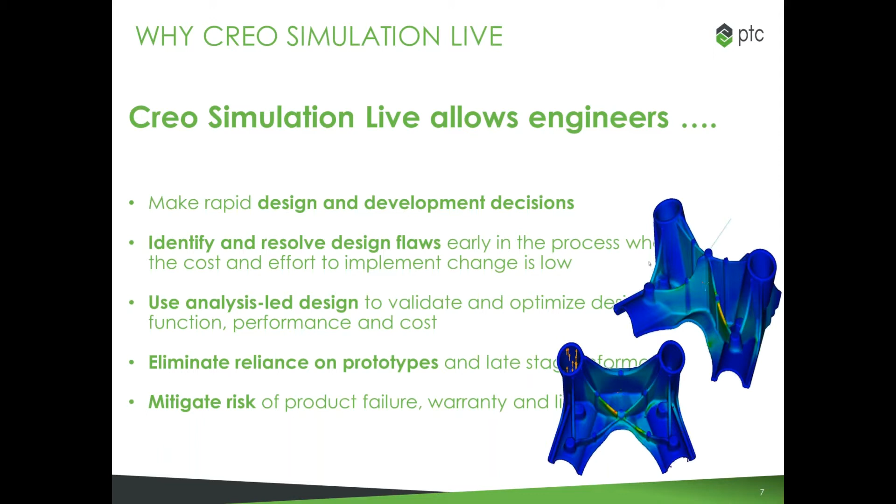What it'll give you is real-time feedback, a very intuitive, easy-to-use application with structural, thermal, and modal capabilities. It gives you the ability to simulate and animate these things and see them in real time, which you'll see as Terry delivers the demonstration. Most importantly, it's embedded integral within the Creo environment, but it leverages the ANSYS simulation technology and power that it provides.

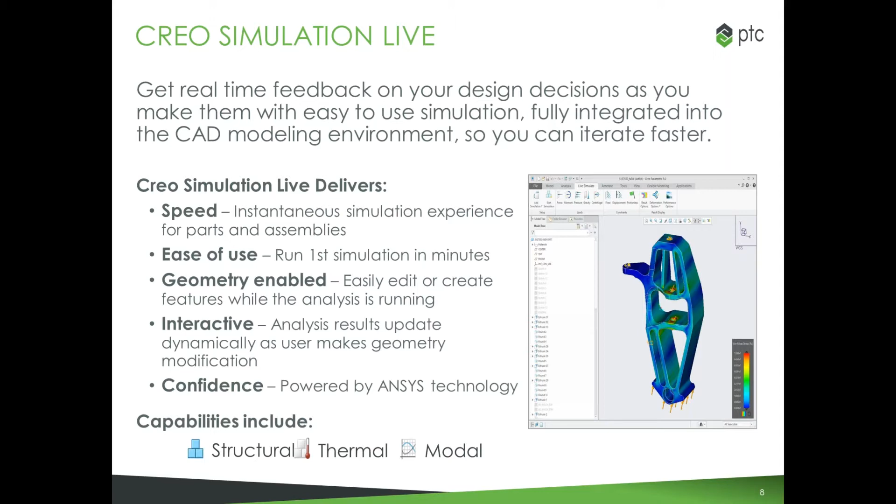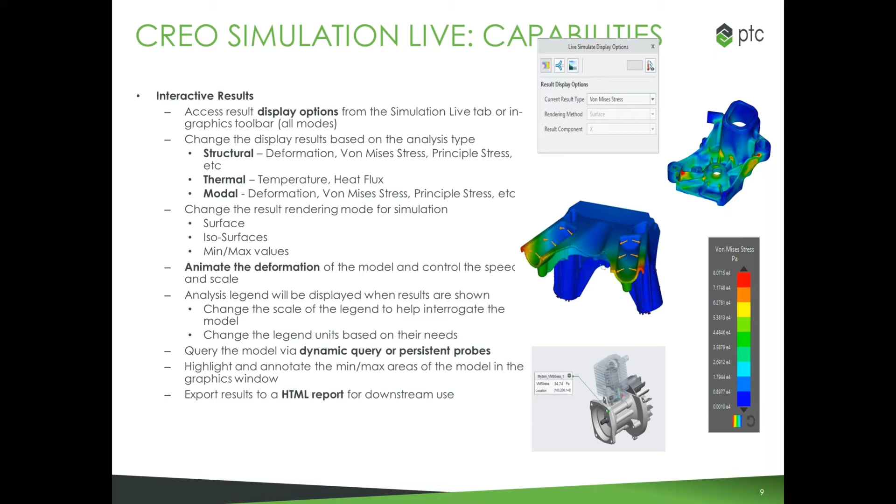I'll just build this slide out at a high level. As you can see here, some of the simulation animations and still photos—Von Mises stresses and the things you should expect from a simulation solution capability—are part of this Creo Simulation Live capability.

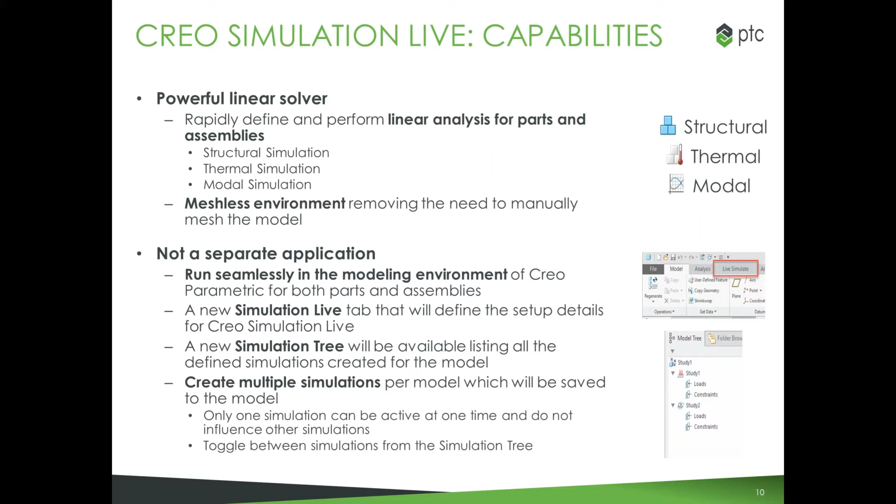It allows you to do power linear solving, the meshless capabilities, and it shows up as a tab within the Creo environment. So as many of you are designers using Creo today to digitally design your products, you want to be able to seamlessly design your parts, assemblies, models, and go very quickly into Simulate, getting those results real time—not having to export out or jump into another application or save files. So from an efficiency and speed standpoint, it's critical that it's a tab within the Creo Parametric application.

I do want to highlight that there are some links here, so hopefully many of you have PTC support accounts created.

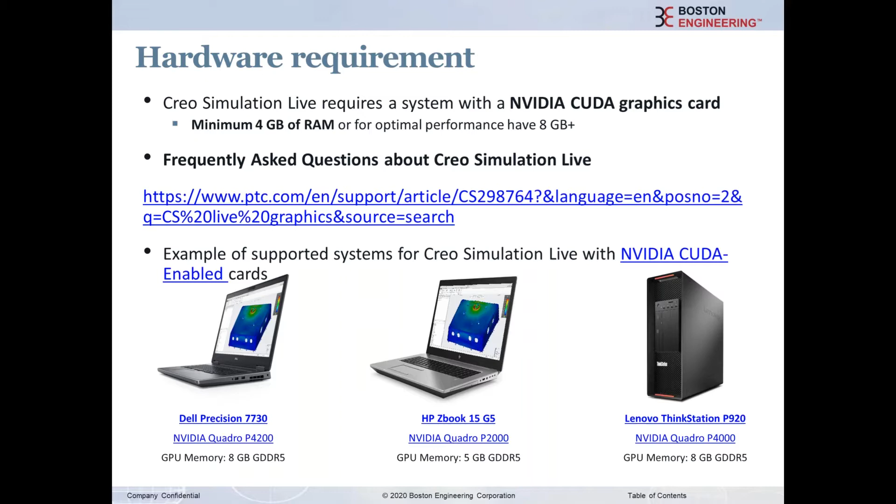This link we'll provide has a ton of frequently asked questions on Creo Simulation Live. It's important from a hardware perspective that it has some requirements - you want to make sure you have certified graphics cards to run Creo Simulation Live, and include that as part of the selection process, or if you purchase the software from Boston Engineering or elsewhere, take that into account, since it's important for performance and making sure you get the results you're expecting.

As noted before, Creo Simulation Live is the first solution that PTC and ANSYS have brought to market. It's been well received. We have a number of customers using it in production today, correlating simulations back to test data. From an accuracy and trust perspective, they see the benefits, and it's bringing simulation more upfront into the design space, as opposed to the more expansive PhD-type solutions ANSYS provides. Many of our customers using ANSYS - this is more purpose-built for the mechanical engineer designer aspect.

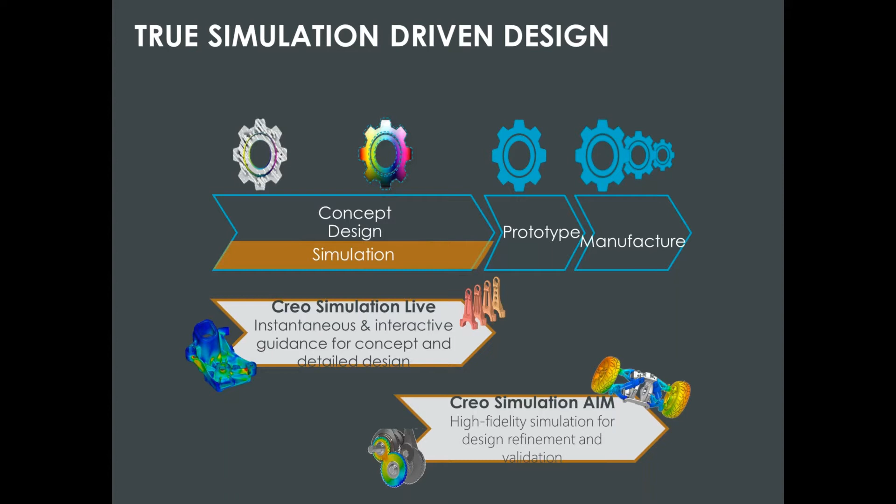Creo Simulation AIM will be coming out. As many of you know, Creo 7 will be coming out in a few weeks. Excited about that - PTC will have new capabilities and extensions available as they continue to deliver more technology. PTC's strategy on simulation is ANSYS, so more to come on that.

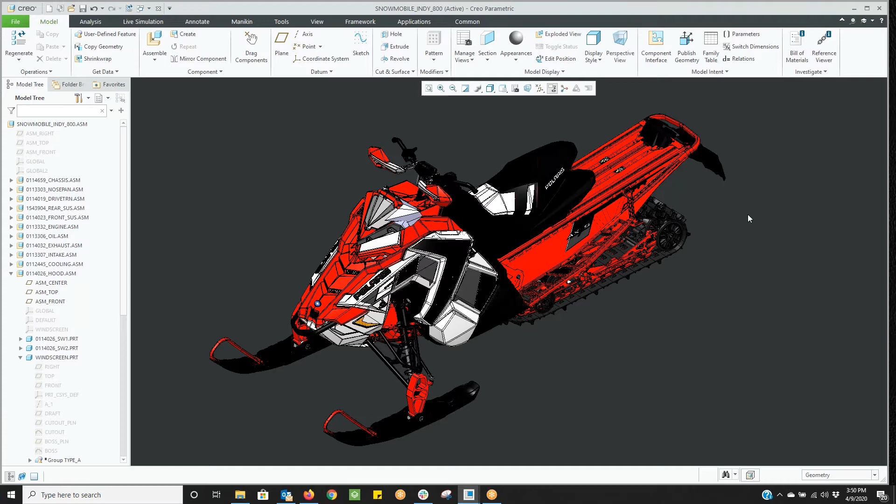We have a snowmobile - those of us who live in the northern reaches of the world see this quite often. This is the Polaris snowmobile out of Roseau, Minnesota. We're going to go into the chassis subassembly, and mainly we're going to take a look at this sheet metal bracket. We're curious what happens if we apply a load on the top of this sheet metal bracket.

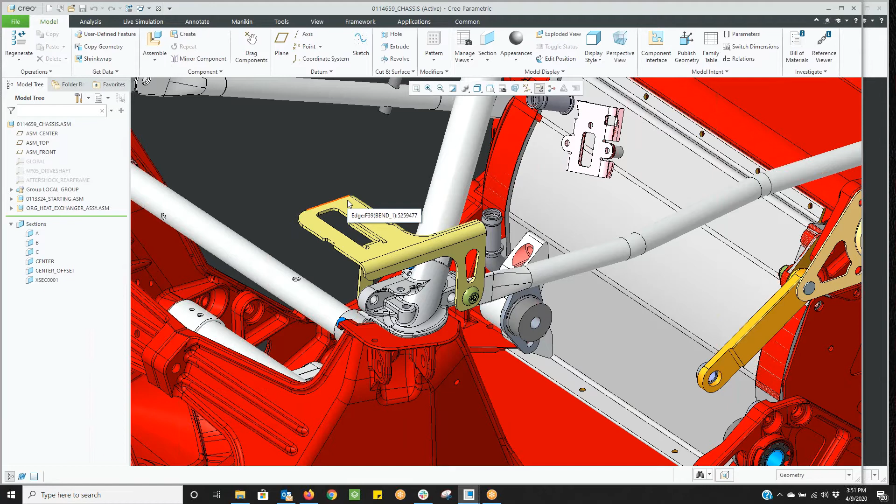Typically you'd do that with an analysis package, whether Creo Simulate or ANSYS, and you'd have to mesh this model and apply materials, loads, constraints, those kinds of things. But I'm going to show you how Creo Simulate Live puts the power of analysis into the designer's hands, so he can assist the true PhD analyst doing the full-blown analysis. This isn't meant to replace analysis in any way, but it gives you the ability to do what-if scenarios very quickly, as opposed to making a design change, running an analysis, then saying 'I don't like that,' undoing it, making a new change, and running another analysis - which takes time and effort.

So I'm going to open this. This is just a standard sheet metal part created within Creo. The material for this part was set up in the part preparation, so it already has a material assigned to it. As John mentioned, we have a live simulation tab in our dashboard, so we'll click on it, and that takes us into our Creo Simulate Live functionality.

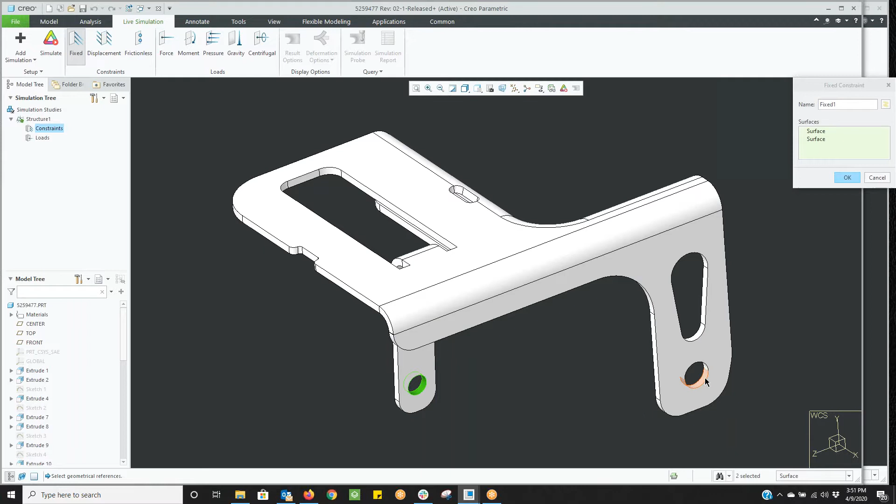If I expand this structure, notice we're looking for loads and constraints. We need to constrain and load this model so we can get an analysis. If I click on constraints, I want to hold this model the same way it was held earlier - it had two bolts holding it in at these locations, so we'll go in and fix those. If I expand my constraints tab, you can see I have my fixed constraints.

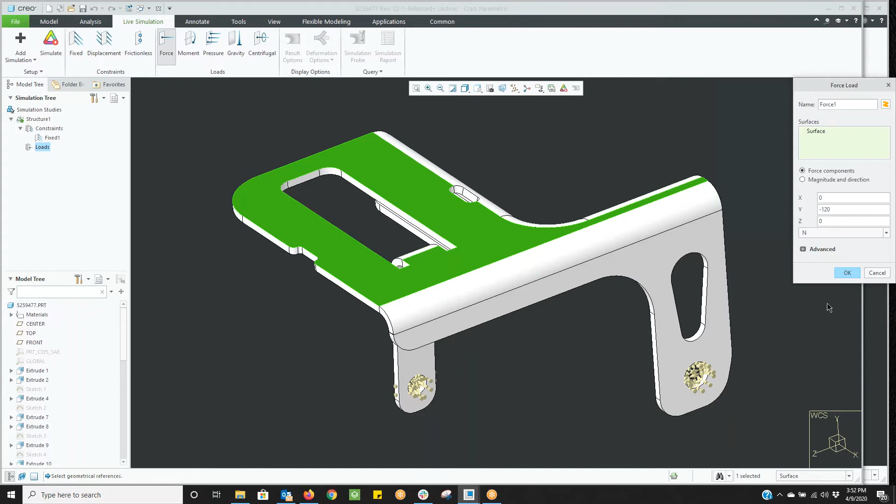Now we want to apply a load to this surface. So we click on loads, create a force, and select the surface. In the lower right corner, we have a coordinate system that tells us our part's analysis coordinate system. I want to go in the Y direction, in the negative direction, so I'll go minus 120. You also have the ability to set units here, so we'll set that to newtons. We say okay, and now we have our part set out there.

It is material specified. The constraints are fixed. The loads are applied. All I have to do is come up and click on the simulate engine, and in a matter of about 10 seconds, I have an analysis result, and I have a legend over here that's showing me my von Mises stresses in megapascals. So I have a maximum of 126 megapascals.

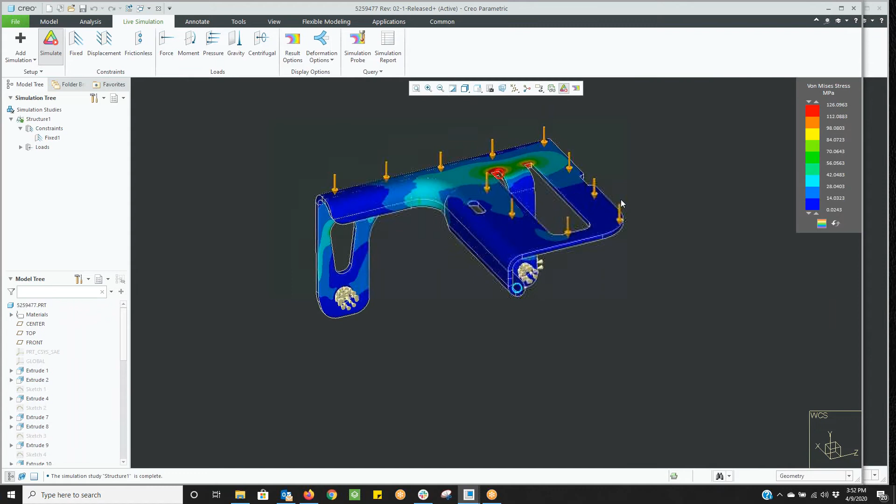So I'm gonna spin this model around just a little bit. A couple of things that we can derive from this model, and then I'll make a couple of changes, is if I go into my results options, I can actually hit the little play button, and we can actually see how that model is going to deform. Now, you have a speed button here that you can slide so that you can dictate how fast you want it to move. You may have something that only moves a few thousandths, which is very difficult to see. You may see the color bands changing, but you really don't know how it's moving.

You can actually go in and increase the scale. Now, this does not change the amount, it just exaggerates it so you can see it visually. And we'll pull that back. We can actually do a true deformation, and you can see how much it would move truly in real life. I'll stop that, go into our results.

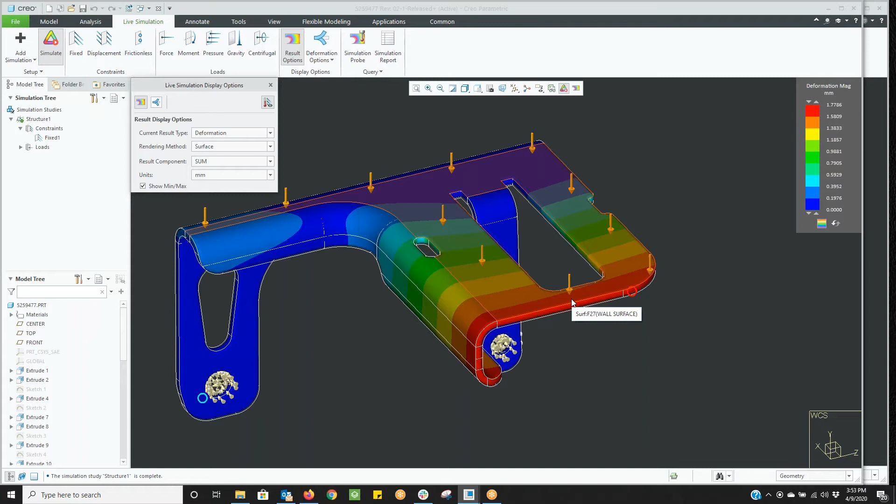Currently, I'm looking at von Mises stress. I could go in and say I wanted to look at a deformation. Well, look, it's moving the most out here, which is the furthest away from our pivot point, which is what we would expect as designers or engineers. I'm gonna take this back to von Mises stress. I'm gonna change the units to megapascals.

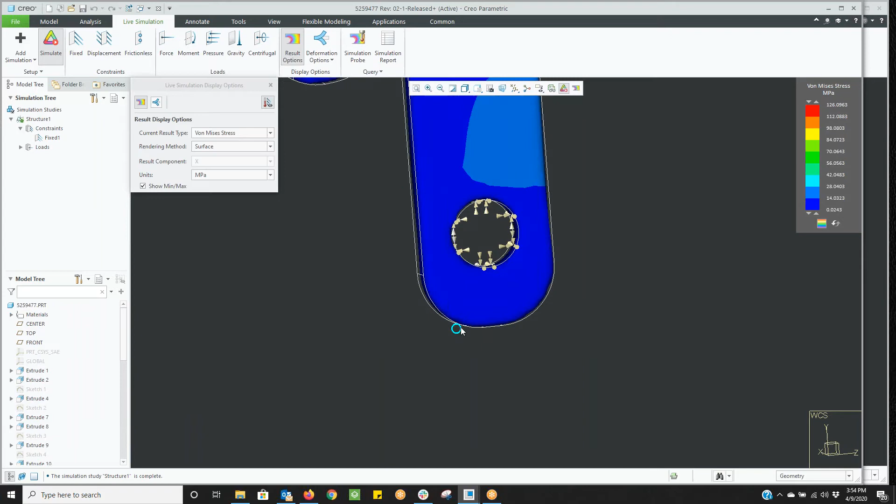Notice we have a button here that says show min max. We have two circles. We have a circle right here. This is the maximum value for this particular model. And then down here at the bottom, as far away from it, would be our minimum. We can turn that on or off and show it at will. So let's go and make a couple of changes so that you can see what happens here.

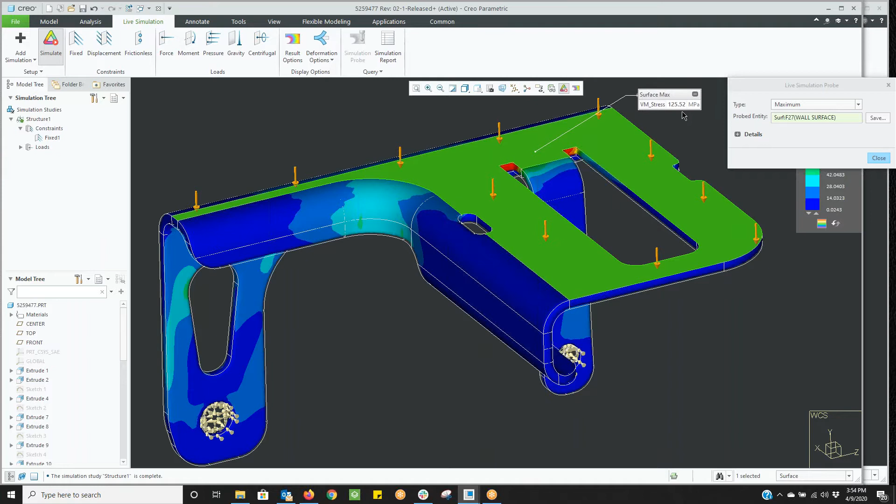So we can take our simulation probe functionality, which is one of our query tools, and we can query, and I can say I want to see the maximum stress, and I want to see it on this surface. And notice it gives me a value in a little box here. It's 125.5 megapascals. I want to save this. And the reason I'm saving this is so you can follow along and I don't have to recreate it every single time. So I have saved that.

Now, if you notice, you have distinct color bands. I can come over into the model tree. I can click on my legend at the bottom, and it'll give me a blended color band as opposed to the distinct lines. That is a personal preference that does not change any of the analysis or any of the values.

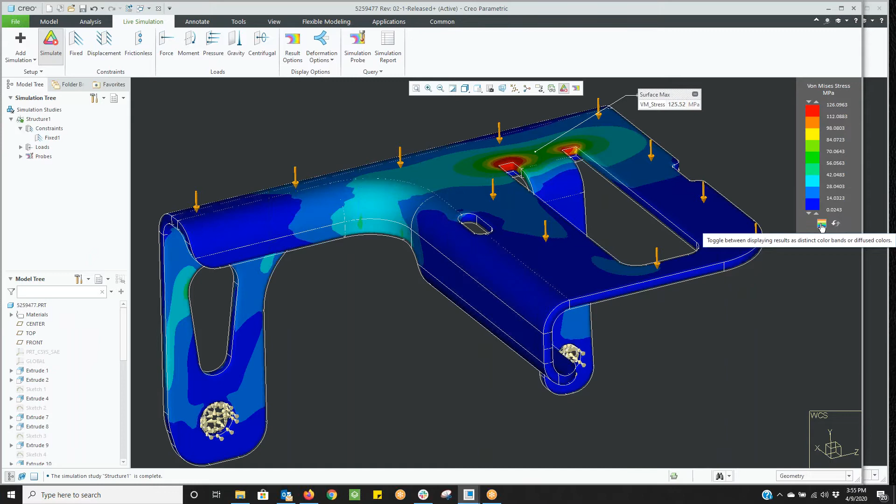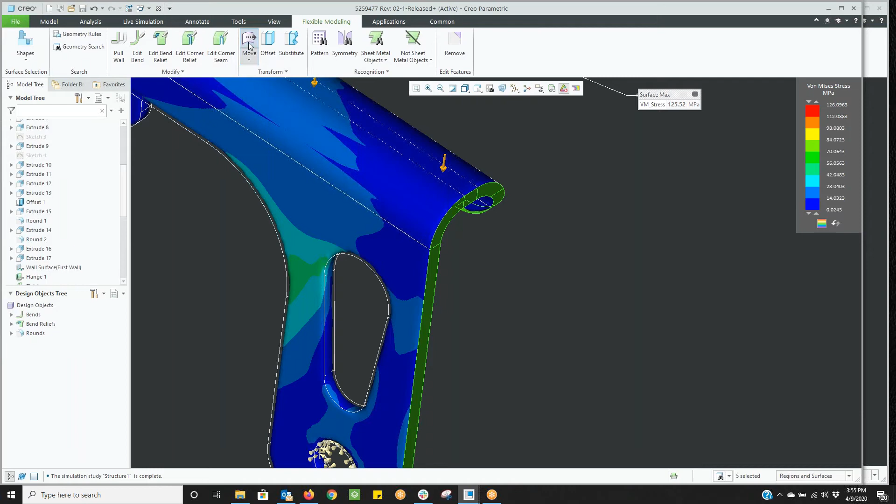So the first thing we want to do is make this part just a little bit longer. So I want to add some length to this end. So I'm going to select this surface, this surface, this surface, this surface, those surfaces. I'm going to go into my flexible modeling tool, and I'm going to say I want to move those along this edge, and I start dragging it to get a number, and I'm going to change this number to about 14 units. And I hit my OK button.

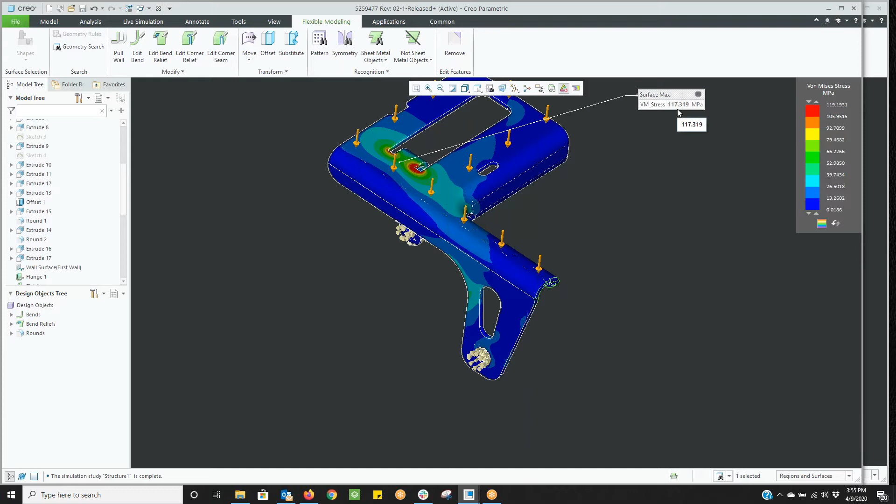Notice it changes the geometry. I've got a little new tangent here. And after it recalculates, it changes my stress. My stress was 125. Now it's down to 117. So we can make those changes, and you can see those happen immediately.

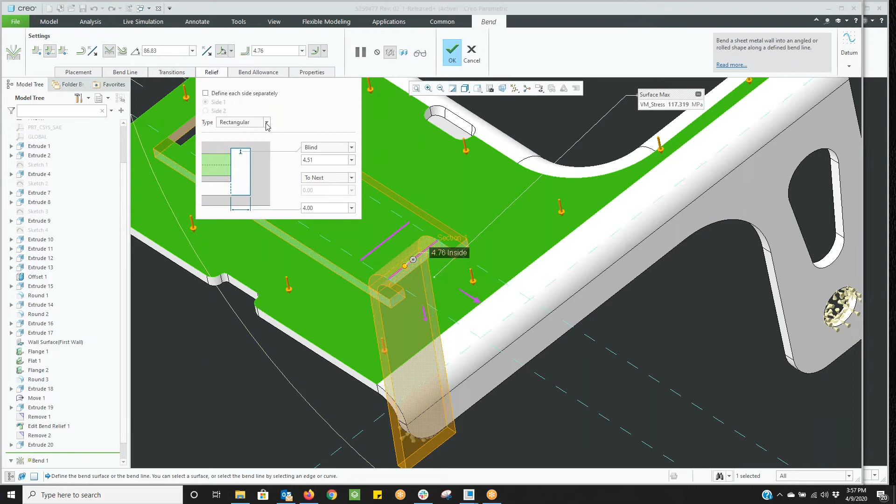One of the things we have here is we have sharp corners. And sharp corners, stress concentrations, aren't good. So let's go into the bend, and we're going to edit the definition of that bend, and we're going to go into our bend relief, and we're going to change those from a rectangular bend to an obround bend, and we'll accept those, and it will regenerate our model. Then it will regenerate our analysis, and it will change a little bit. Now we're down to 107.

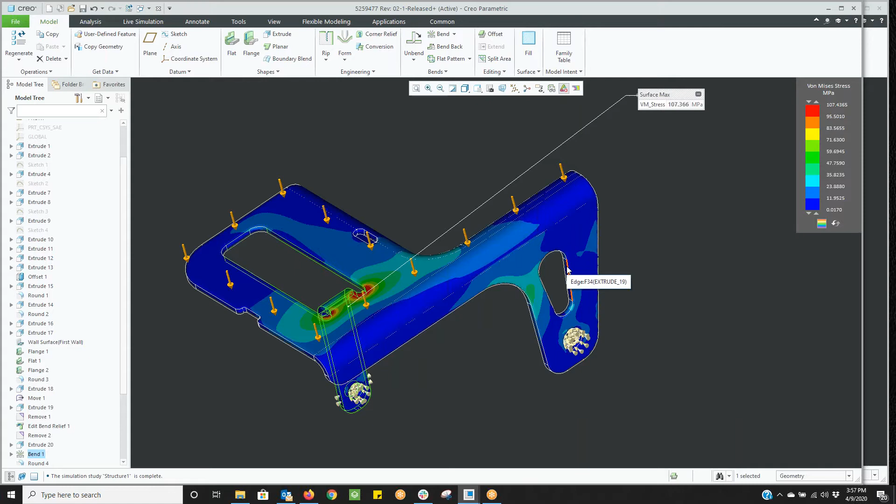Now the last change I'm going to make: this hole in the original model was there to remove weight. There's no wires going through it. There's no bolts or anything holding it together. It was there strictly to reduce weight. So I'm going to go into our flexible modeling. I'm going to highlight it, and I'm going to recognize that as a complete hole.

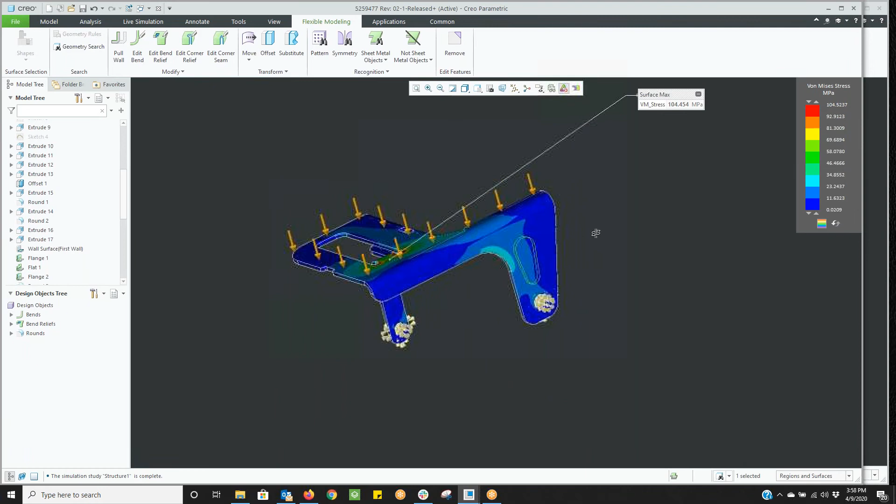And we're going to remove that hole, and we'll complete our feature. And when we complete our feature, and it has a chance to go in and regenerate the entire model and everything, notice that we have taken our model from the 125 that it was at initially down to 104. And it happens that fast.

In a matter of less than 5 minutes, I have made 3 or 4 changes to this model. I've lengthened it, I've removed holes, I've done this, and these changes that I have made are parametric. So as you make those changes, they update. If I were to go in and change the material, the values would change based on the material properties that we have and the like. So

Hi, Terry, did we lose audio? Can't hear you. I'm turning this over to Jim. Jim, are you there? Yes. All right. Well, thank you, Terry. Yep. Sorry about that. We'll have to clip that out.

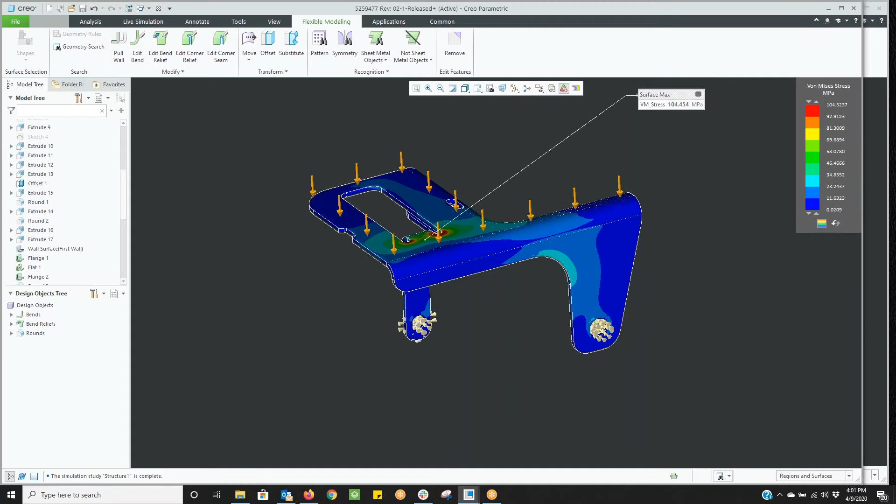The first question is about the materials. And so Terry, we still have control of the mouse, right? Yeah, why don't we go up to File, Prepare, and we'll just show model property. We'll hit Change, and then everyone will notice that sort of legacy material folder that we have in there. That's all the classic original Pro Engineer materials or Pro Mechanica materials from way back in the day. But next to that, parallel to that, is a standards material, Granta Design.

This is a really deep material library that Granta has partnered with both Creo and with ANSYS to provide a lot of precise material definition. So deeper bench here, a little bit less homework. You still need to do some homework. There's a comment here, it looks like from Gavin, about linear.

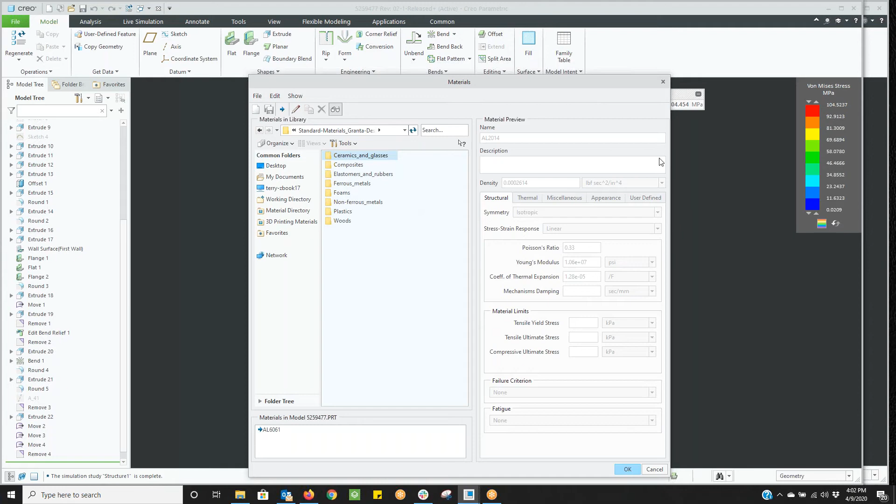Yeah, so John in the beginning had mentioned, one of the purposes of this tool is a real quick tool, and as a result, it's not a full-blown, non-linear, full dynamic FEA solver. It's really focused on linear statics, modal analysis, and thermal. And Terry showed us a linear static analysis. So we really don't need a lot of material properties for linear static analysis. All we need are the Poisson's ratio and the Young's modulus. You can always go to MatWeb and download and plug those in.

Yeah, so the next Creo 7 is going to come out with CSL. It's also going to include some of the fluid analysis tools. And again, it's not going to be a full-blown CFD solver like we're used to with either Simerics or ANSYS Fluent. It's going to be a lighter weight tool that you can dynamically change and automatically update, air and water flow. So that's really neat stuff. Looking forward to that. Terry, we'll do another one when the fluid comes out, right?

That is correct. We'll do another one when the fluid comes out. All right, excellent. Let's see.

So, question here about contact. For true contact analysis, we want friction, we want relative motion, so all that is nonlinear. And so right now, the only management of contact for Creo Simulate Live is a bonded representation, which again, if we just assume for a quick second I've got all my bolts torqued, my rivets properly inserted, there's no relative motion at the joint, then we can still absolutely use CSL as a tool to make some design changes up front conceptually.

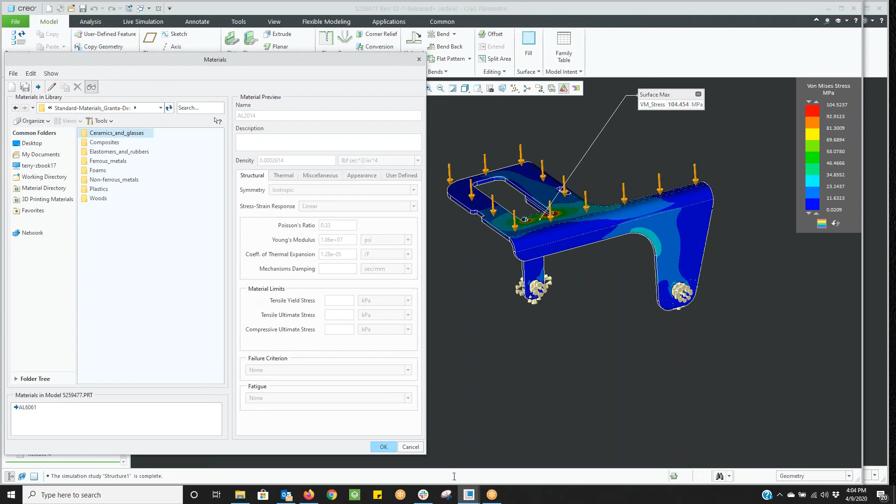Let's see what else we have here. So someone's asking, can you specify a deformation in addition to a force? Yeah, Terry, why don't we close down the materials window there, and we'll just go back to the live simulation tab and take a peek at what all of our options are. So if we go over to live simulation up top, underneath the constraints, we've got fixed and we've got displacement. So that's where we can set a certain displacement. We've got frictionless, which is kind of like a planar type constraint.

And on the load side, we have, I would say, 5 of the most popular loads, right? We've got force and moment, and then we've got pressure, gravity, and centrifugal. So we've got a combination there of forces and accelerations. I would say that for that combination of 5 loads and 3 constraints, you're probably capturing 75% of what you're trying to do with a quick linear FEA.

And who knows? ANSYS is always going to be developing the capabilities of the tool as the customers send in requests, and for sure, we Creo users are going to take advantage of that. I'm not going to put any words in anyone's mouth, but I wouldn't be surprised if we started to see a little bit more functionality based on how people are using it and giving feedback to both Creo and ANSYS.

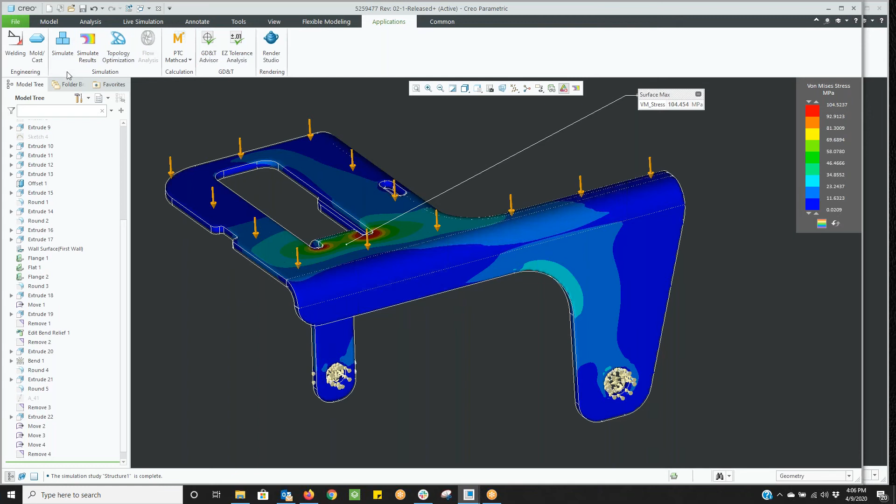Let's see. So we got a question here on what's the difference between Creo Simulate Live and the analysis tab. So Terry, if you want to click on applications, or the analysis tab to the left, I think is just some tolerance analysis tools. But there's also a button for simulate analysis, and it's the same as the application for simulate. So that is the thorough finite element analysis, the traditional mesh tool that most of us have probably been using for some time. You're going to have a lot more options in regards to loads and constraints, and in regards to physics. So you've got thermal, stresses, nonlinear, frictional contact, full dynamics, thermal stress, so a little bit of multi-physics there.

So really, when it comes time to do the more advanced analysis, and maybe something more accurate, and when I say accurate, I mean a tool that allows you to throw options in when you are at the point where I've got test data, I've got finite element analysis results, and there's a disconnect, and I need to dig into the FEA and find out why it's not matching the test. Your full-blown FEA solver like Creo Simulate or ANSYS AIM is going to do that for you. CSL is not meant to do that.

Now, it doesn't mean CSL won't give you an accurate answer. If you're simulating something that's linear, so relatively small deflections, relatively simple geometry, there's no reason why you can't get test data that's going to match up to the CSL, but it's just not exactly designed for that.

And so again, the way this is deployed, and we have a question here on what we have seen from companies that are using this, and the answer to that is yes, it's been deployed, and yes, it's being used successfully. And so we've actually got a customer who we were just talking to. They've got a larger team, large enough where they've got quote unquote designers and quote unquote analysts, whatever that means, and they've got full-blown ANSYS.